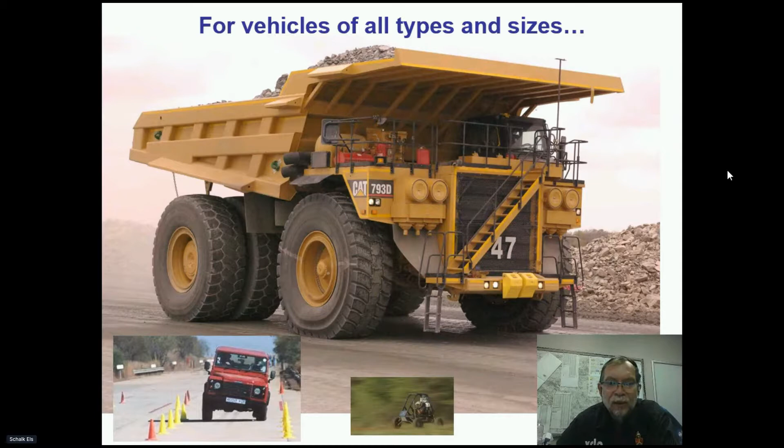Now, the picture we're looking at is a very simple one. Basically, the vehicle drives over the terrain, and the vehicle is in contact with the terrain through the tires. So the tire-terrain interaction is where all the external forces are applied to the vehicle, if we neglect aerodynamics. It is also the area of special interest for the terramechanics community and the off-road vehicle community.

We need to understand the terrain-tire interface and how those forces are generated. Then the forces are applied to the vehicle through the suspension system, which usually consists of linkages, but also springs and dampers. The reason for the suspension system on the vehicle is to manipulate the vehicle dynamics so that the human driving or sitting in the vehicle is kept comfortable and safe. This is the basic picture we need to understand in order to analyze and model the dynamics of off-road vehicles.

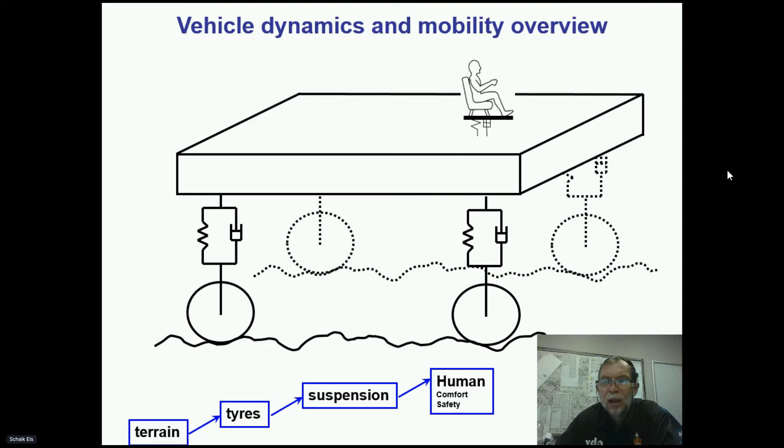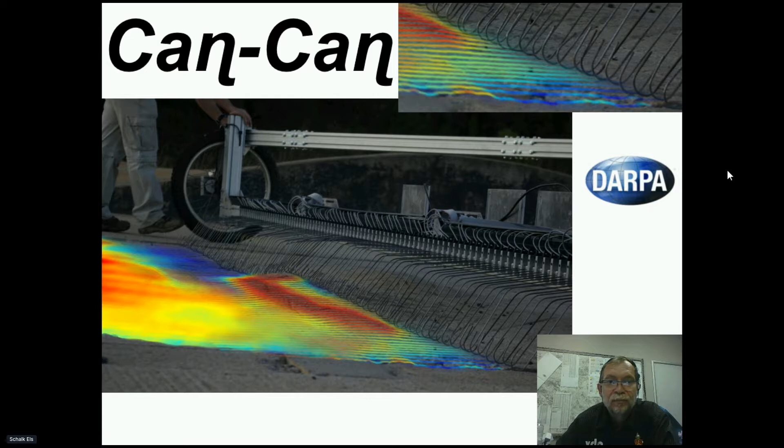Next in line, after we understand the terrain, is the tires and especially the enveloping effect.

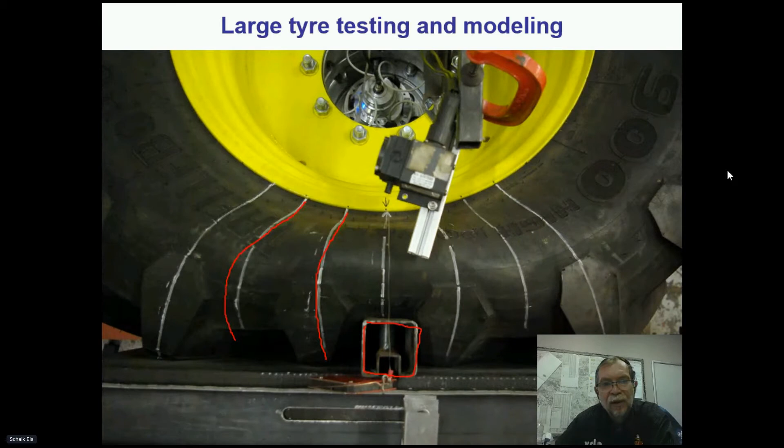Here you can see a large agricultural tire on a static test rig. The white lines on the tire used to be straight when the tire was not compressed, but now we compress the tire against a square tubing cleat, an obstacle against which we compress the tire. Now you can see these initially straight lines are very curved, giving us an idea of how much the tire actually deflects around these obstacles.

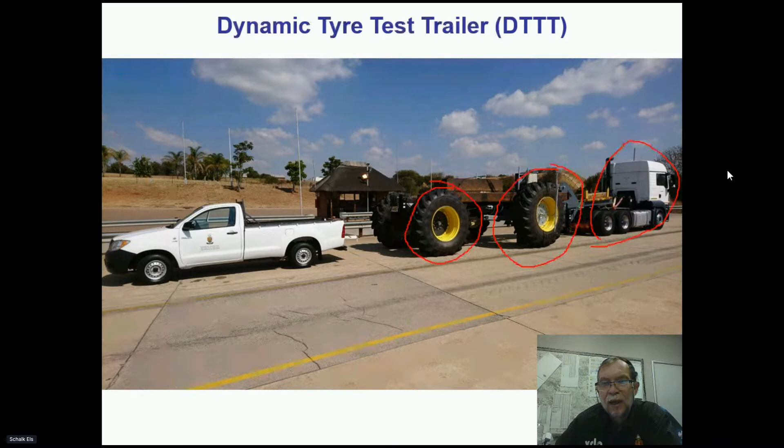We also built a dynamic tire test trailer. Here you can see our tire test trailer. The tire here in the middle is the one we're actually testing, while the other tire is just a stabilizing axle. We can use this equipment on any terrain as long as we have a towing vehicle capable of towing this tire test trailer over that specific terrain.

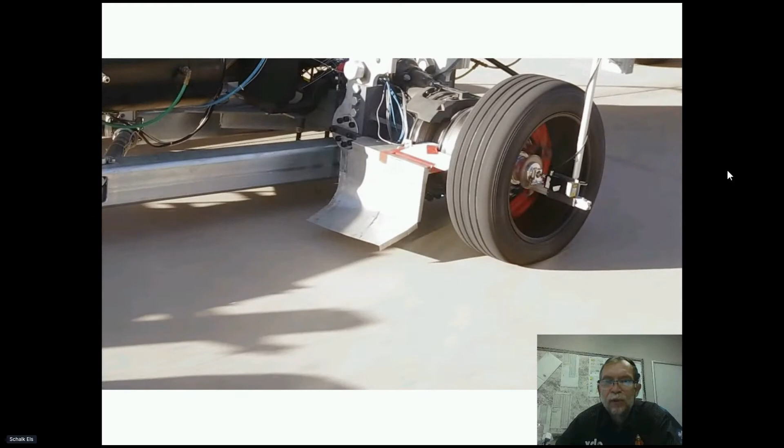Here's an example of a small passenger car tire where we just do a longitudinal force versus slip test. We simply tow the vehicle at a speed and then we brake the tire.

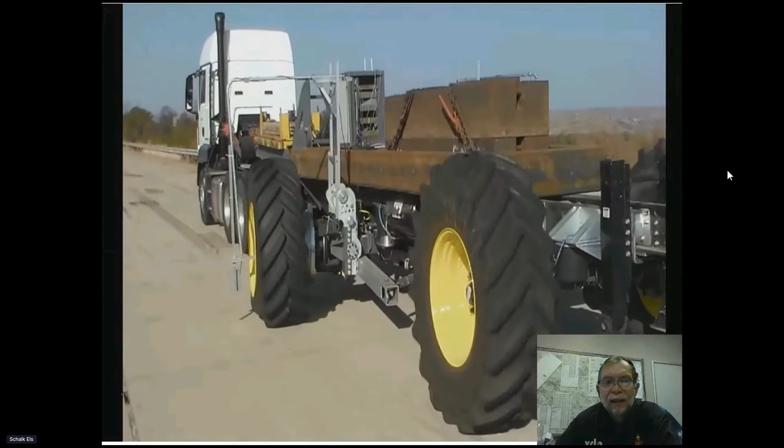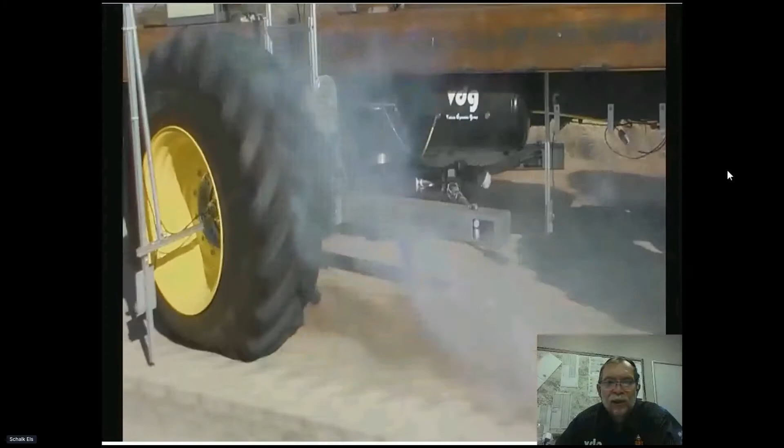If we do this on very large tires, you'll now see our tire test trailer. Again, the two rear axles are only for stabilizing purposes, but the wheel in the front is the one we actually test. We apply a slip angle to this tire, and then slowly brake it until it locks up. At the lockup point, we release the brakes, adjust the slip angle using a slip angle actuator until we reach a new slip angle, and repeat this process. We can do this on tires up to 2.1 meters in diameter and 5,000 kilograms vertical force.

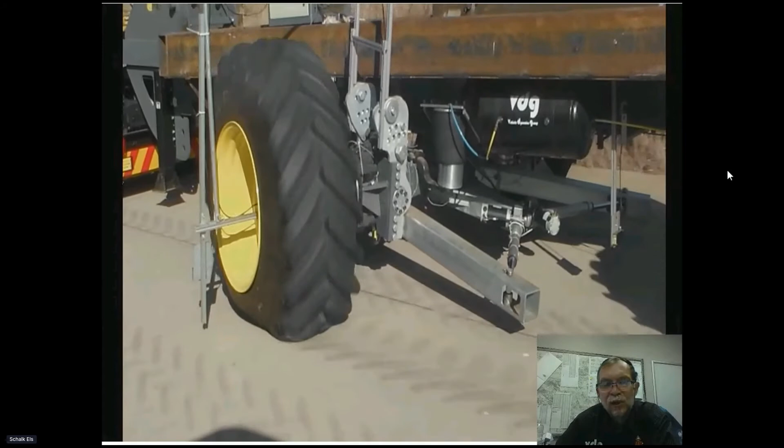The forces between the tire and the tire test trailer are measured with a 6-component wheel force transducer, so we get longitudinal, lateral, and vertical force, as well as the 3 associated moments, measured directly using this transducer. You'll also see how the stiffness of the tire changes as we basically lock the tire. So this is a very powerful piece of test equipment to test large tires on different terrains and surfaces where we want to get tire characteristics.

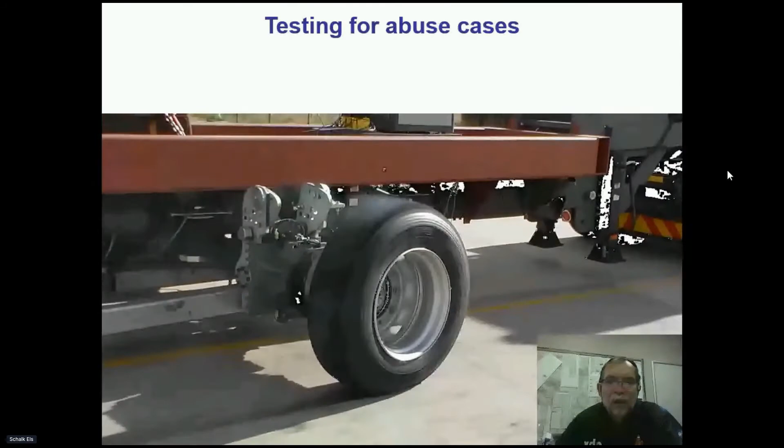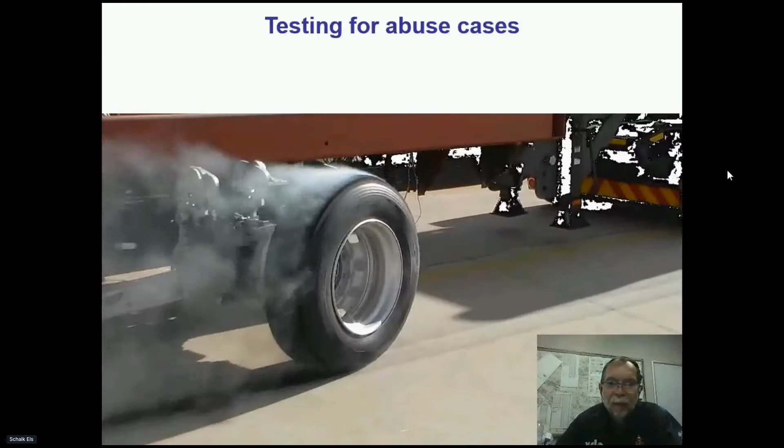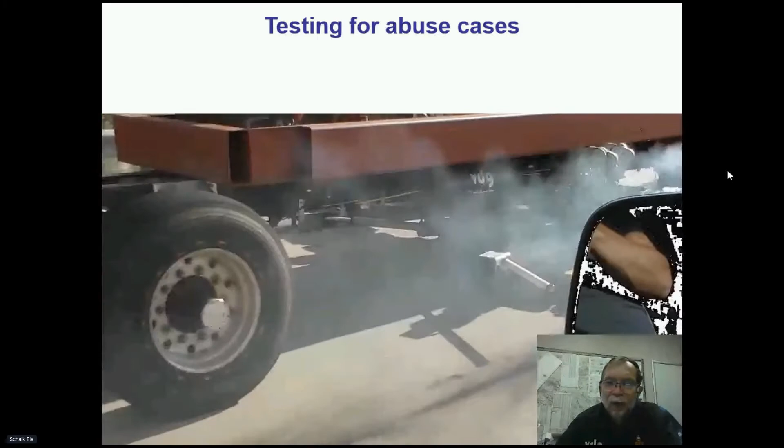We can also perform abuse cases on this test trailer. Here we're running the tire at a fairly high speed with a constant slip angle, and the friction generates heat, and you can see the effect of this on the wear of the tire. This is something you cannot do normally on vehicles while driving, because the vehicle would have rolled over long before you could reach these abuse case applications.

We also measure rolling resistance. This picture may look a little strange because we have this massive tire at very high load, and we tow it with this very light sport utility vehicle. But the reason is that we connect the vehicle to the trailer with a very sensitive load cell, one with a full-scale range of about 500 kilograms, which means we can measure the rolling resistance force. This force opposes motion, but it's usually less than 1% of the vertical force on the tire, so we really need to be able to measure very accurately.

It also means that the axle position on this trailer can be adjusted so that the center of mass of the trailer is above the wheel contact position, eliminating most of the vertical load on this very sensitive tow bar load cell.

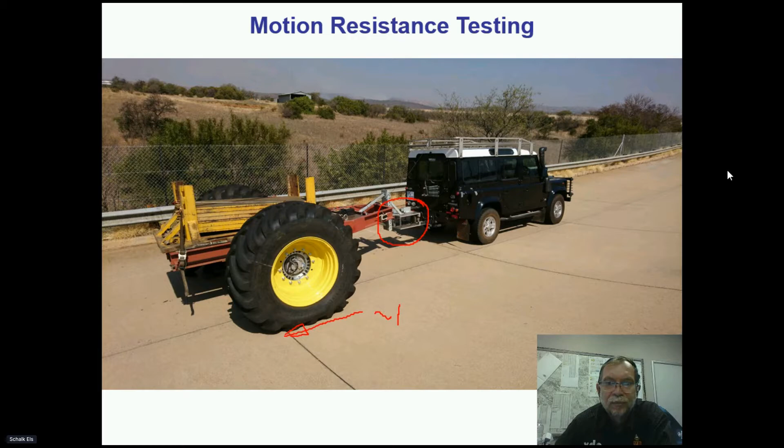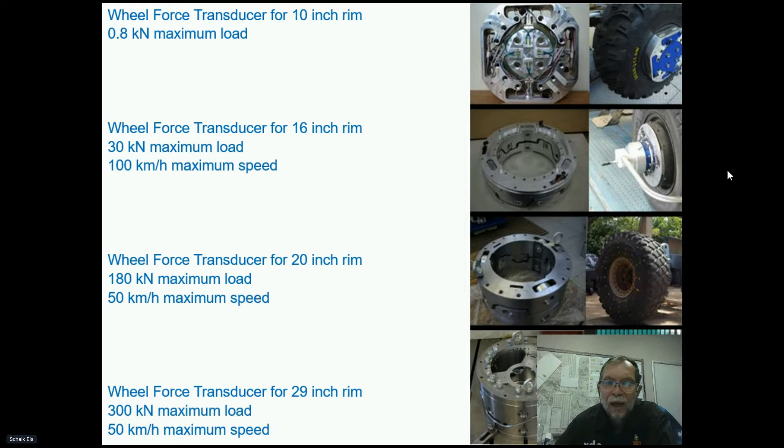I alluded to wheel force transducers before. These are very expensive pieces of equipment, so we embarked on making our own. These 4 ranges of wheel force transducers are all in-house designed and manufactured by the Vehicle Dynamics Group. They vary from a small transducer for a typical 10-inch rim, small all-terrain vehicle or quad bike type application, to a passenger car sized wheel force transducer that fits 16-inch rims and above. We also have a 20-inch wheel force transducer designed for typical truck and off-road applications, and a very large 29-inch version capable of carrying 300 kilonewtons, or 30,000 kilograms of vertical load, at 50 kilometers per hour.

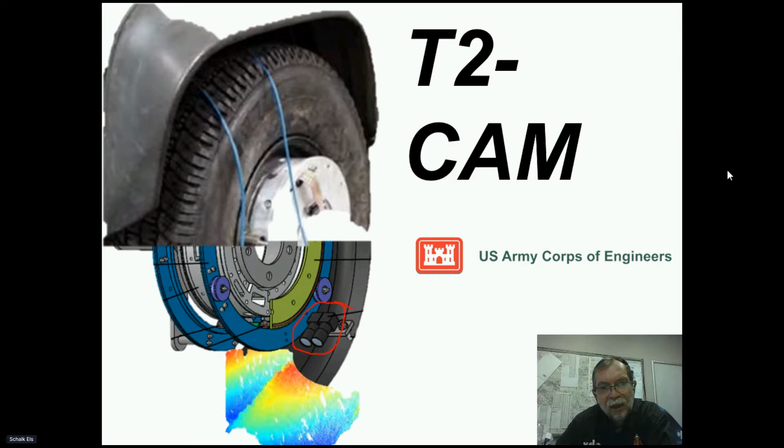Still on the topic of tire-terrain interaction, and especially coming towards softer terrain, which is terramechanics, is this system which we call the T2CAM system, short for Tire Terrain Camera System. What we basically do here is we have 2 digital cameras mounted inside the tire. These cameras sit inside the air cavity of a tire, and as the tire rotates, these cameras face the contact patch area of the tire.

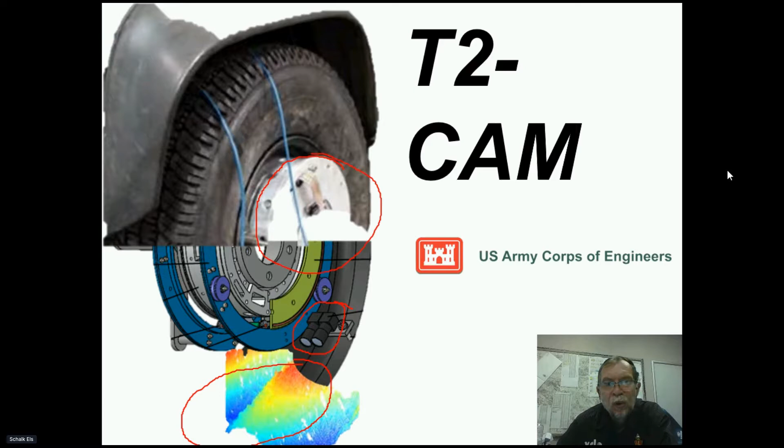We can then use digital image correlation techniques to get the 3-dimensional deformation of the inside carcass of the tire. You'll also see that this is coupled with a wheel force transducer measuring all 6 force and moment components. So in theory, having deformation and forces can enable us to calculate stiffness. Of course, very complex stiffness, but it allows us to get a much deeper understanding of what actually happens between the tire and the terrain.

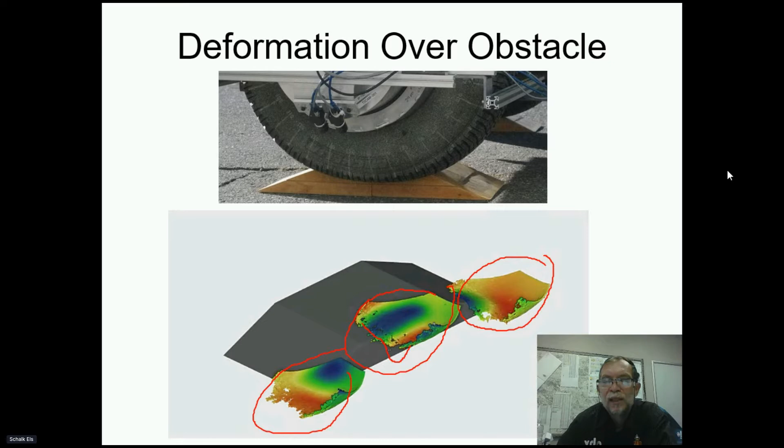In this case, you can see the tire traveling over the trapezoidal bump in such a way that only half of the tire is on the bump. The image at the bottom that rotates shows us three analyses where the tire just starts contacting the bump, where the tire is on top of the bump, and where the tire leaves the bump. You can clearly see the areas in blue where the tire is compressed, and the area in red where the tire is extended as it hangs off the side of the bump. This gives you an idea of the 3-dimensional displacement measurement we can get in the contact patch.

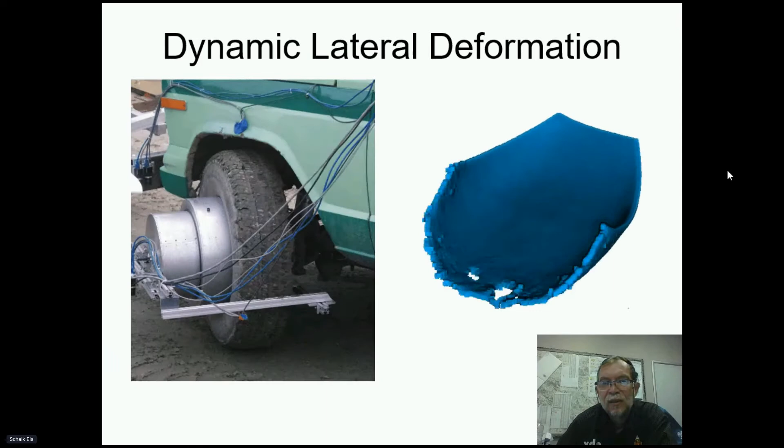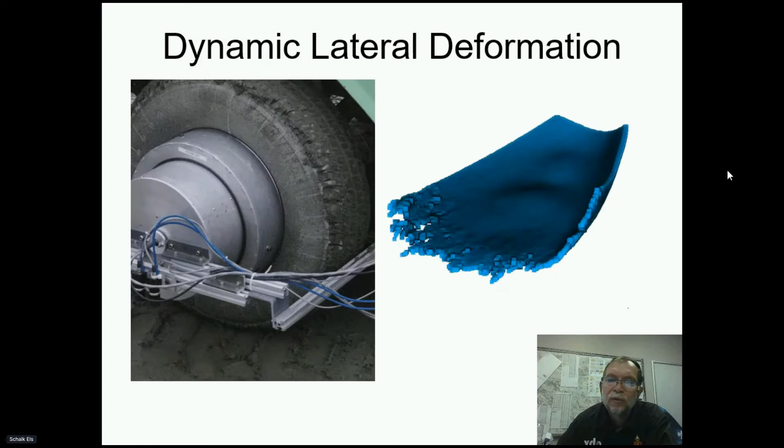We can do this dynamically. So this is a vehicle performing a slalom test on a muddy, icy gravel road. This is the inside of a tire on the right-hand side, and you can see not only how the tire sidewall flexes left and right, but you can also see the obstacles in the tread of the tire. So the terrain over which we drive is not smooth. We have this 3-dimensional deformation picture coupled to a full force and moment picture on the tire.

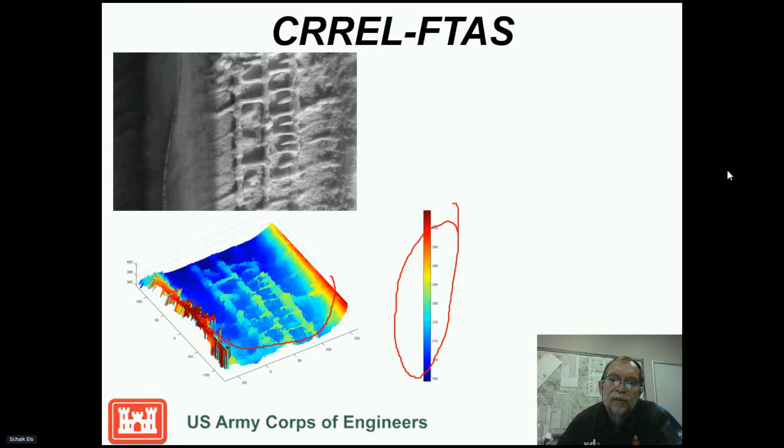We also use the same digital image correlation technology using 2 cameras, but we can now use that to measure rut depth, for example. The photo at top left shows you a picture of a tire tread pattern left in snow, and the picture at the bottom shows you the digital image correlation where we actually have a 3-dimensional profile of this rut with a scale, so that we know the exact depth of a rut left by the tire.

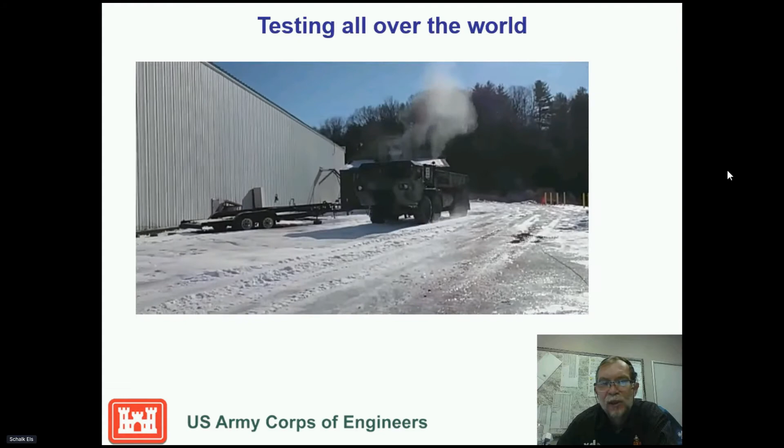This is an example of a braking test on ice, very slippery conditions. The vehicle accelerates and then brakes, but simply locks the wheels, and the vehicle skids to a standstill. In this case, we also use digital image correlation to measure slip and slip angle and other vehicle parameters.

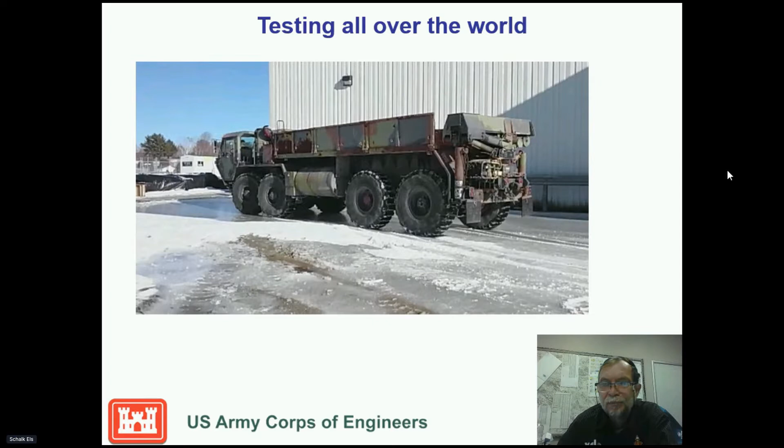One of the big problems with the types of vehicles that we're working on, namely off-road vehicles, is that they also require good on-road performance. Many off-road vehicles have soft suspension systems and high centers of mass, which means that they are susceptible to rollover.

So this is a test we witnessed many years ago where this vehicle was tested for a double lane change. The driver applied too excessive a steering angle and the vehicle physically rolled onto its side, mainly due to soft suspension combined with a high center of mass. This is a severe problem in many of these types of vehicles.

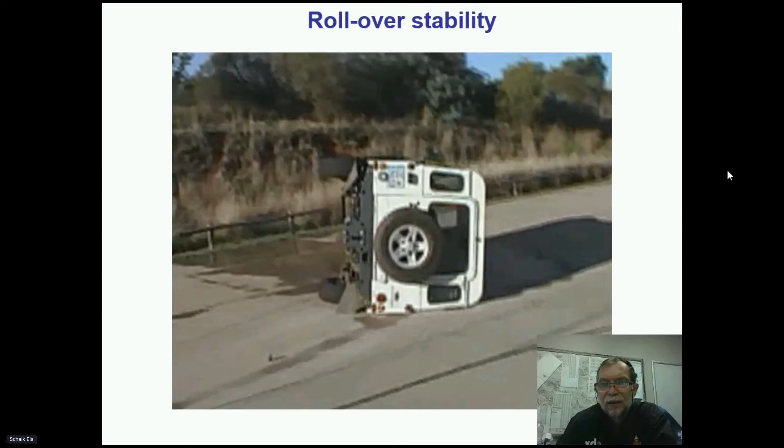Part of that solution is working on suspension characteristics. Now the problem is that once you have the suspension characteristics required for good off-road ride comfort, meaning large suspension travel, fairly soft springs and low damping, you have on-road stability and handling problems. If you now design the suspension system for good on-road handling and stability, then the off-road driving capability of the vehicle suffers. So for those purposes, semi-active or active suspension systems have become popular.

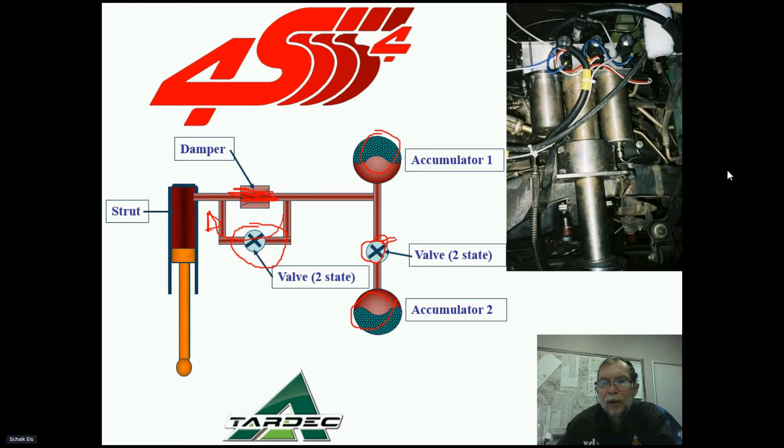In this semi-active hydropneumatic suspension system, we can have a setting for good on-road handling and stability, but we can have another setting for good off-road comfort and large wheel travel, and we can switch between these two settings in less than 100 milliseconds to change the suspension system between ride comfort mode and handling mode.

Another big challenge nowadays is the driver, the control system behind the vehicle. So the driver of a vehicle needs to control the speed of the vehicle through the throttle and the gear change. The driver needs to brake the vehicle to slow it down, and the driver needs to apply steering. Now, we all know that humans are error prone, and many accidents are basically caused by the human making some guesses or applying some inputs to the vehicle, which can result in an accident.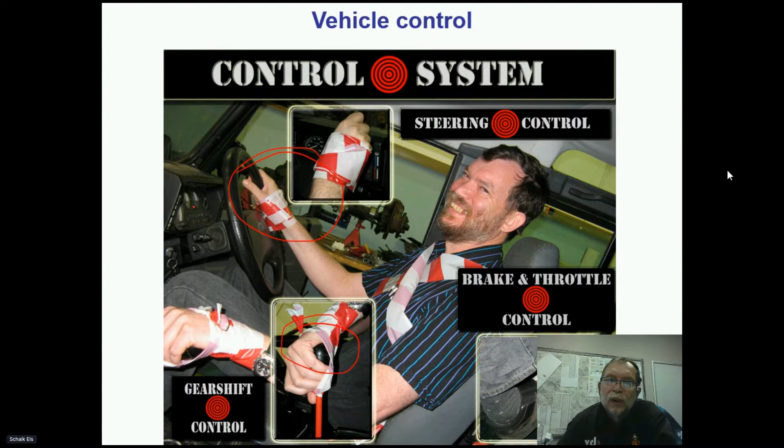So the solution to that is very widely known now, and that is autonomous driving. In this case, you can see that same test vehicle again performing a double lane change, but the driver doesn't actually have to drive the vehicle. The vehicle drives itself using sensors and control algorithms.

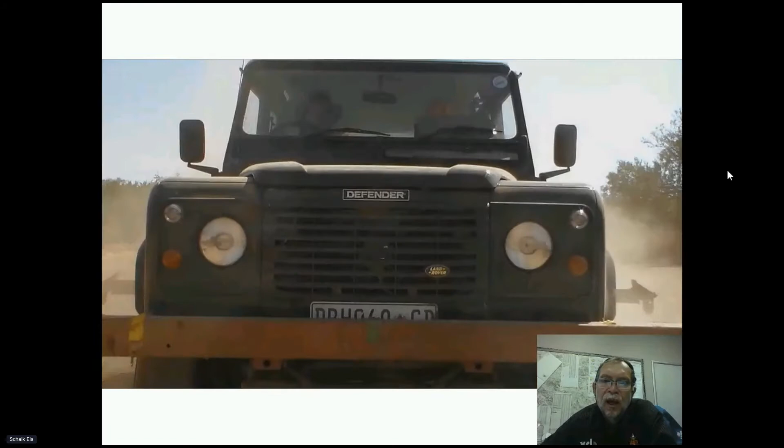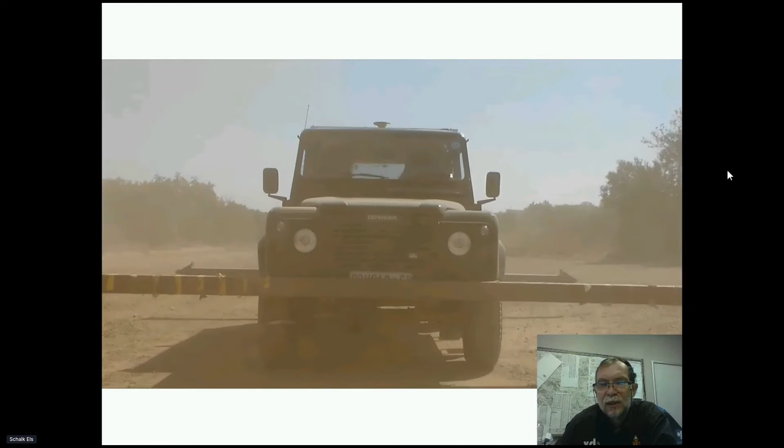The challenge with off-road vehicles, however, is that these control strategies must be able to adapt to the conditions. The roads may be rough, there may be a lot of dust in the environment, so adaptive controls are required that can actually handle a very wide range of on-road and off-road driving conditions, such as you can see in this double lane change on the gravel road.

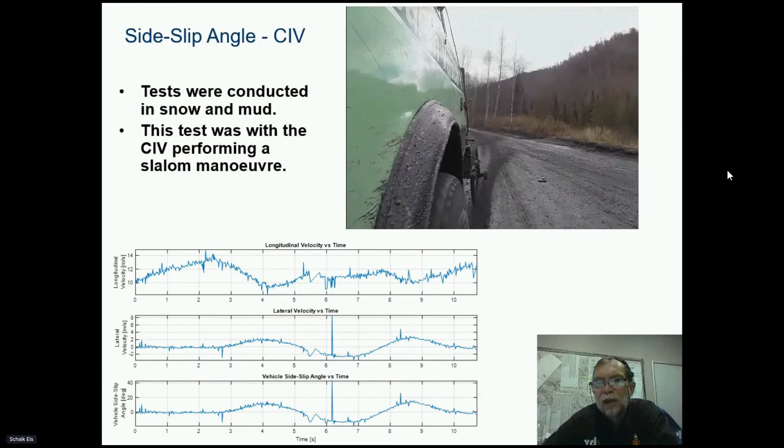This slide shows a slalom test performed by a vehicle on slippery, muddy terrain. In this case, one of the big difficult things to measure under these conditions is the actual slip angle of a vehicle. So we use digital image correlation. You'll see that there are cameras mounted to the side of the vehicle, and these cameras basically face downwards towards the terrain. By using digital image correlation, we can measure things like vehicle speed, longitudinal vehicle speed, as well as lateral vehicle speed, and the resultant, of course, gives us the side slip angle between the vehicle and the road in which we're driving.

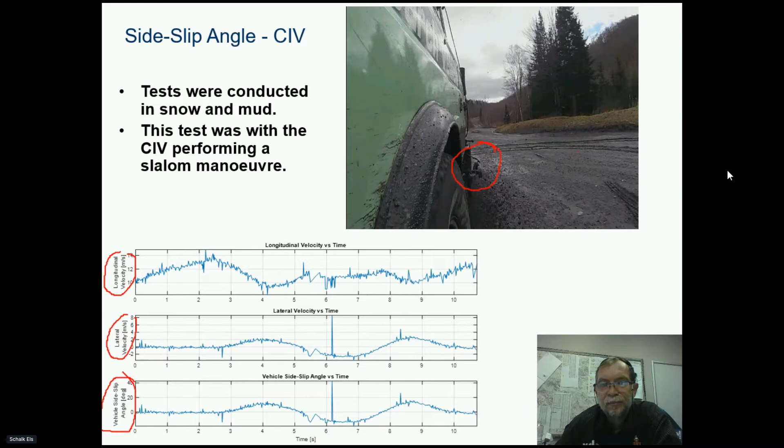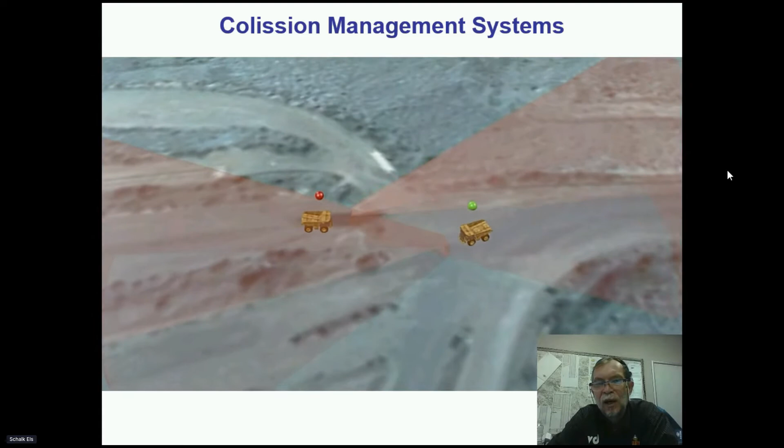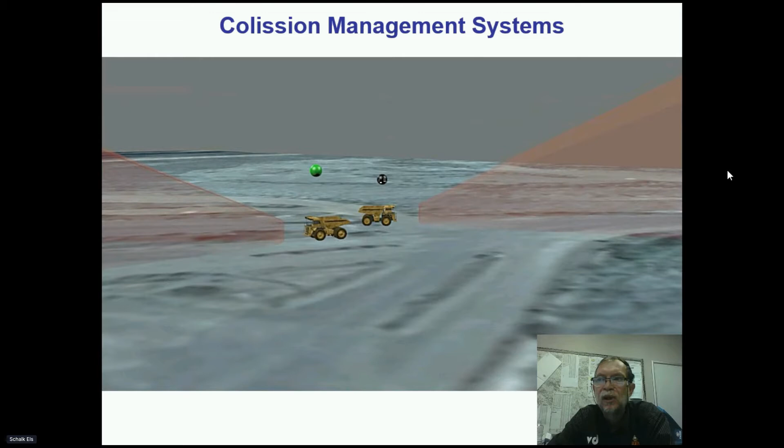One of our more recent research areas is in the field of collision management. There's lots of similarities between this and autonomous driving, except that these collision management systems are designed specifically for mines, and they are designed to prevent collisions between very large off-road vehicles. In this case, you can see two heavy dump trucks, and we are doing a lot of work for the mines in South Africa in order to implement these systems to reduce collisions or avoid collisions between vehicles.

These vehicles are very heavy, the dynamics are slow, they can't stop very quickly, they drive on haul roads, which are mostly gravel roads, often wet gravel roads because of dust suppression. So their dynamics are quite slow, they take a long time to accelerate and brake and steer. Therefore, technology is very applicable in helping us to actually keep these vehicles safe and keep them from colliding, especially in conditions where the driver, again, is not in a position to make a suitable decision.

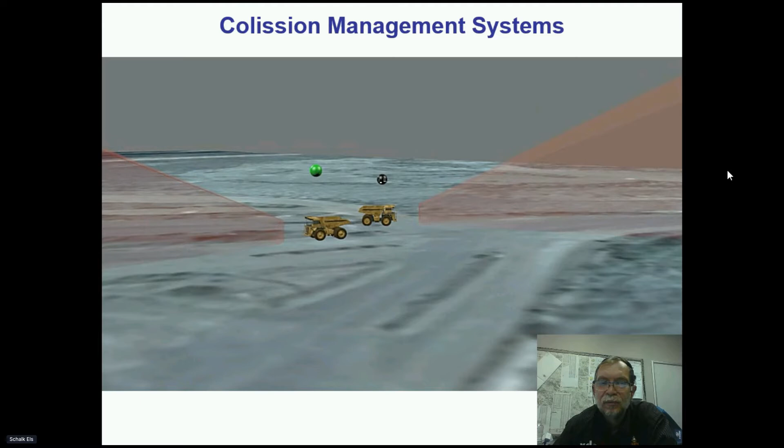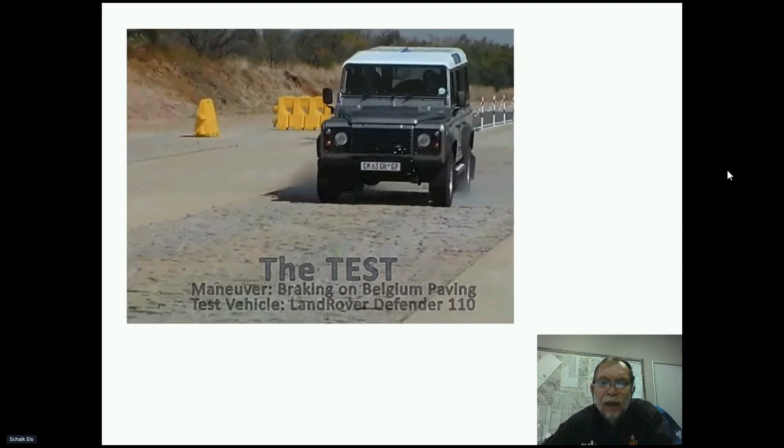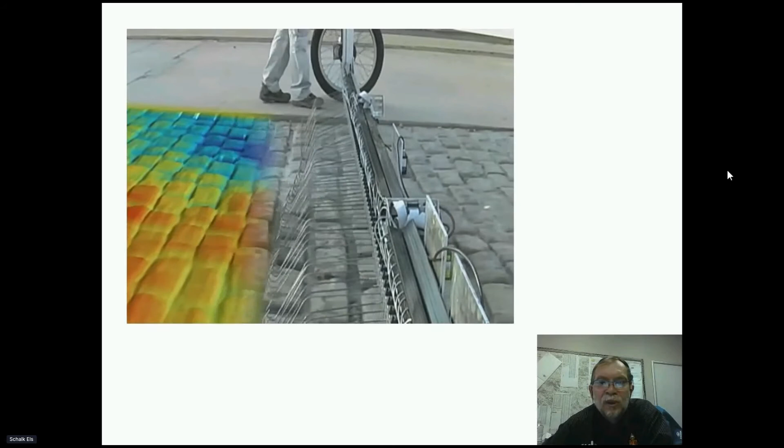So in general, the vehicle dynamics picture for off-road vehicles will now be illustrated in terms of a short example where we developed ABS, anti-lock braking systems. We took a test vehicle with ABS fitted, did a braking test on very rough terrain. We measured the profile of that rough terrain using our can-can machine with the arms, so the real-world profile becomes a digital terrain profile. We then characterized the tires and built models for the tires.

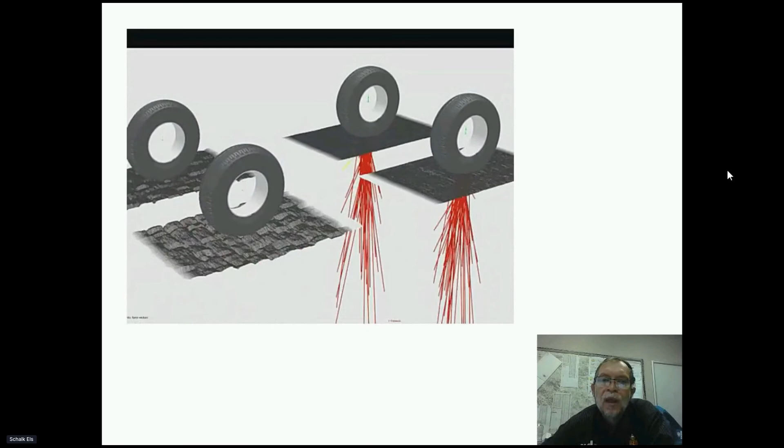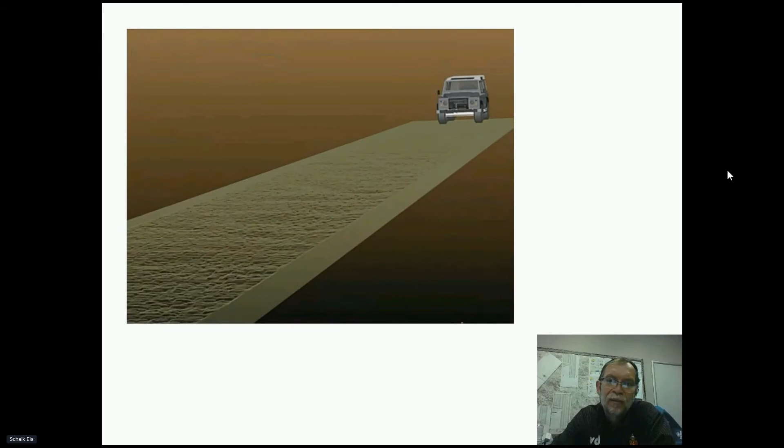Here you can see that the tire model will now generate all the vertical, lateral, and longitudinal forces, as well as the associated moments. Then we'll add the rest of the multi-body vehicle dynamics, so that adds suspension characteristics, springs, dampers, moments of inertia, drivetrain, everything we need, as well as the control system for the ABS.

We then simulate the ABS braking system on this rough terrain and calibrate back to the tests we performed. And then we use this model to change either the suspension system or the control algorithm parameters until we find a better solution for the specific off-road driving problem, in this case, ABS braking on rough terrain.

Thank you, and you're welcome to ask questions.